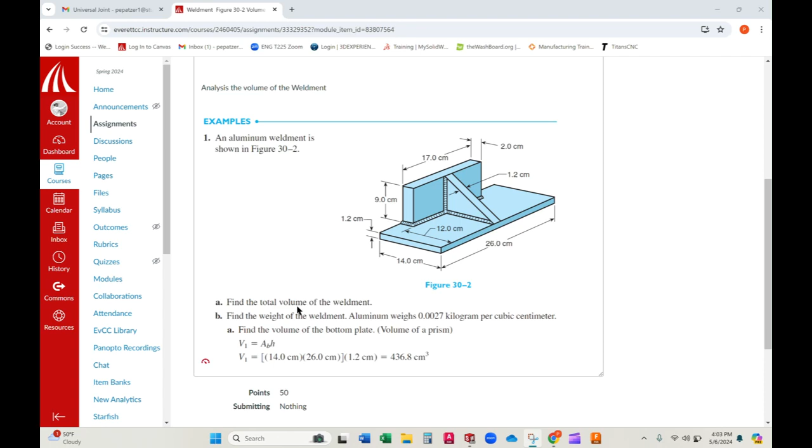I'm going to push this off to the side, open up SOLIDWORKS, grab a fresh new document, and slap a sketch on the top plane. Before I get excited, I'm going to come down here and change to centimeters instead of inches. Very important to change that first, to keep us all on the same page.

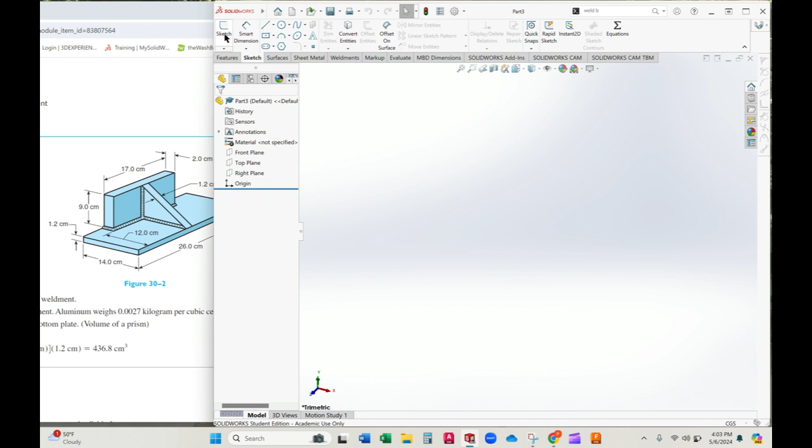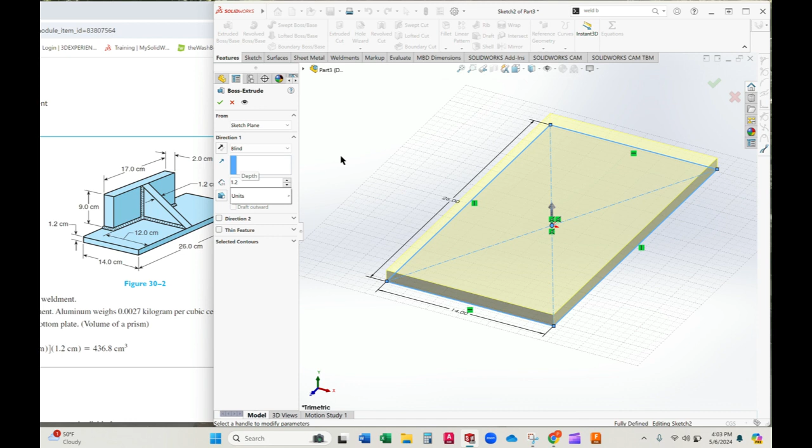Top plane, center rectangle, starting right at my origin point. I'll call that side 26, and the other side 14. Then I turn it into a feature by extruding it, 1.2 centimeters thick, and have it go downward.

There's my base plate. Onto that I'm going to throw another sketch for the back plate. Again, another center rectangle, lined up with my origin point. This one's going to be 17 long by 2 thick.

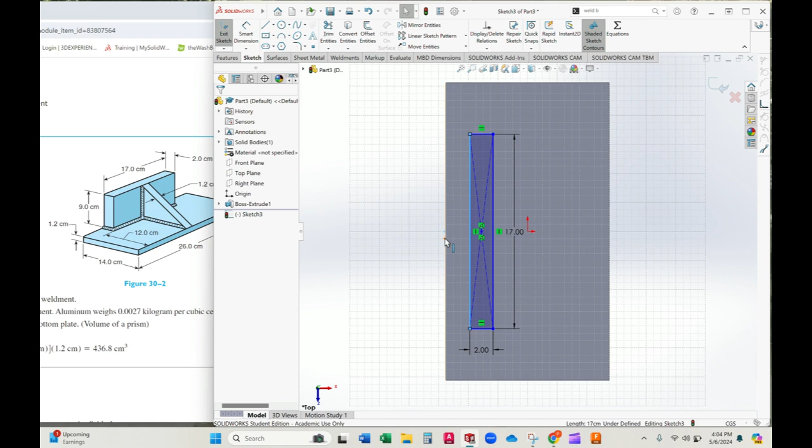I'll use my selection tool. Select this back edge, hold shift, and this back edge — those two are collinear. And the center point on the rectangle, hold shift, origin point — those are horizontal. That locks it in place. Turn it into a feature and extrude it for a height of 9.

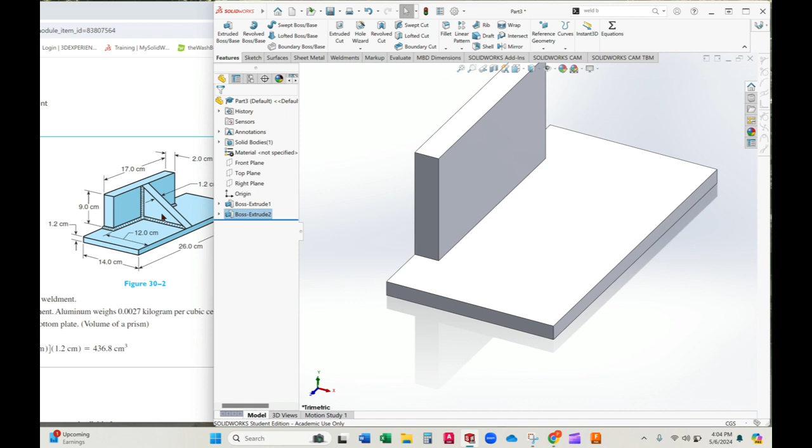Now I just need to put this rib in here. For that, we've got a handy little rib tool. It asks where you want to put the rib. Because I put this whole thing centered on my origin, my front plane runs right through the center, so I'll put it on the front plane. I'll define it with a line that goes from the top up here all the way down to that point.

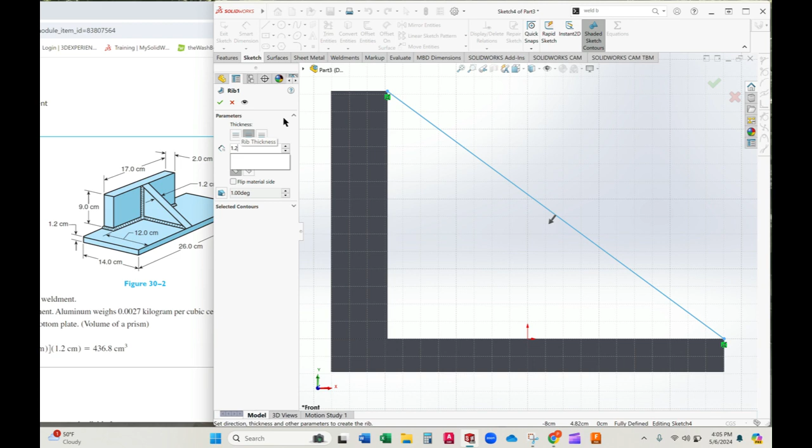Then I'll exit this sketch and I'm back in my rib tool. It's going to be filling the rib down towards the bottom — that's what I want. And I want a thickness of 1.2. That looks pretty good. So there is my shape, quick and easy.

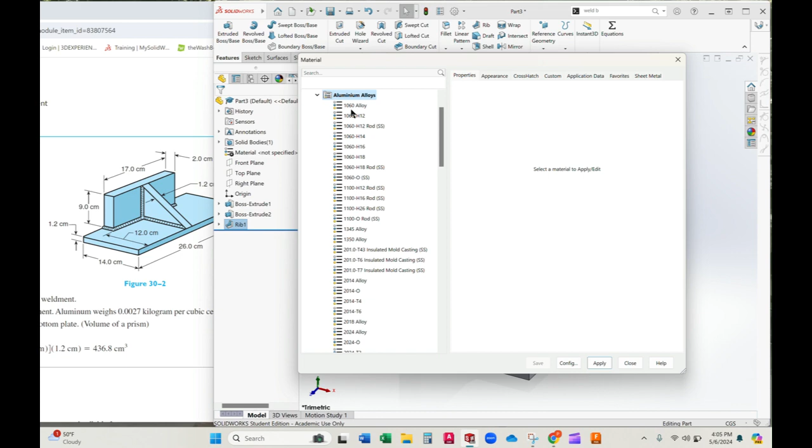If I want to assign a material to it, I can come up here, click edit, and go down to appearances. I have my material menu, and we're not doing steel today — we're going to slap some aluminum on it. There we go. So now it's made of aluminum.

Now I can come in here, click my evaluate button, and look for my mass properties. I've got my mass, I've got my volume — all that good stuff right here.

If I wanted to actually throw some weld beads on it, there is a Weldment toolbar. If you don't have it, you can just type it into your search up here, and weld bead will pop right up. Using this, the easiest way to do it is just say I'm going to be putting down weld paths, and how thick do you want them?

I'm just going to guesstimate — these are about a quarter centimeter thick, since we don't actually have an assigned value here. Then I just draw in the path, clicking where I want it to go. There's one path. I'll say okay, I'm going to add another one, so I'll have another weld path going straight up here.

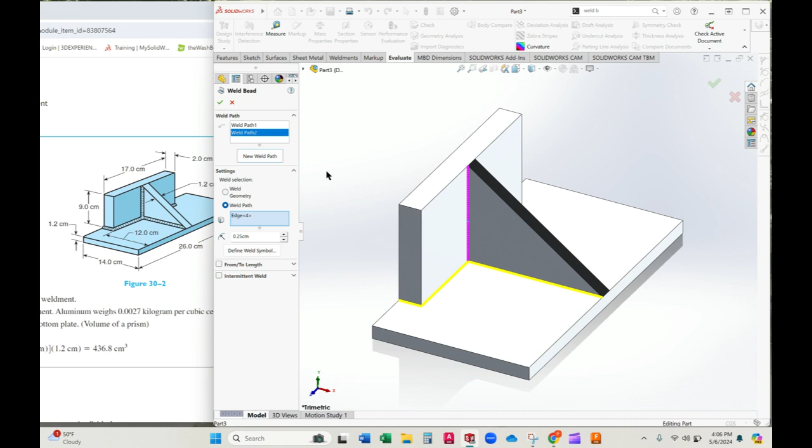Tell it I'm going to add another one, rotate my part around, one on the other side, going to add another path — one, two, three. And that looks good.

Go back to my ISO view, and now I can have it show my weld paths up underneath this eyeball. Let's scroll down a little ways — it's one of these options in here. Oh, there it is, view weld beads. There we go, so now you can see the beads for the weld and everything.